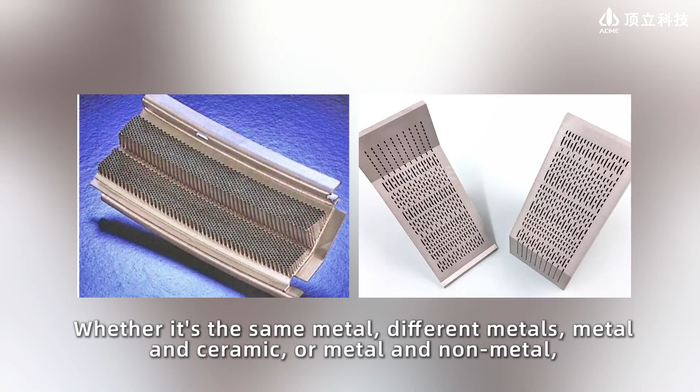Can you believe it? There's a technology that can fuse different materials together without any adhesives. Whether it's the same metal, different metals, metal and ceramic, or metal and non-metal, it achieves an atomic level bond, forming a seamless, solid piece.

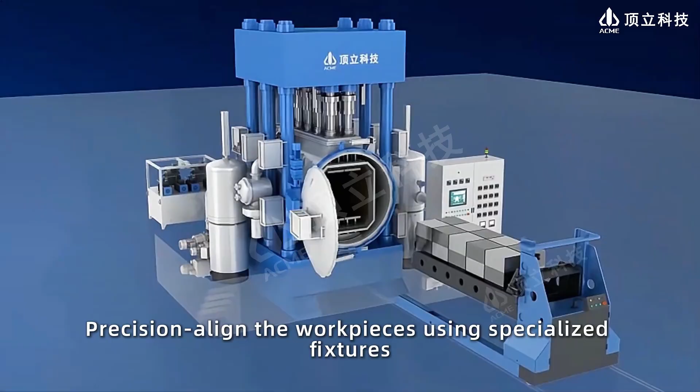This is vacuum diffusion welding technology. Precision align the workpieces using specialized fixtures and place them into the vacuum diffusion welding equipment, pumping the furnace chamber to high vacuum to prevent high temperature oxidation and facilitate diffusion.

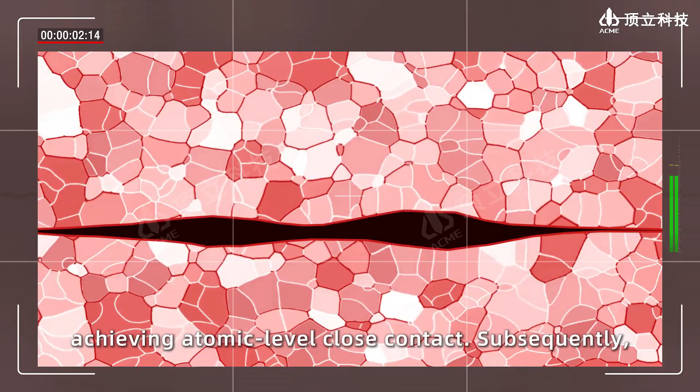The diffusion welding process temperature is generally set at 0.5 to 0.8 times the base material's melting point, with corresponding pressure applied simultaneously. Under the combined action of temperature and pressure, microscopic plastic deformation occurs at the contact interface, achieving atomic level close contact. Subsequently, atoms continuously diffuse across the interface, ultimately achieving solid-state metallurgical bonding.

After completion, the workpiece is slowly cooled, depressurized, and removed.

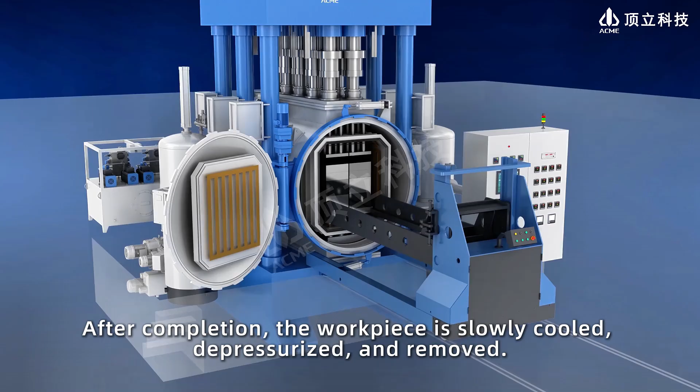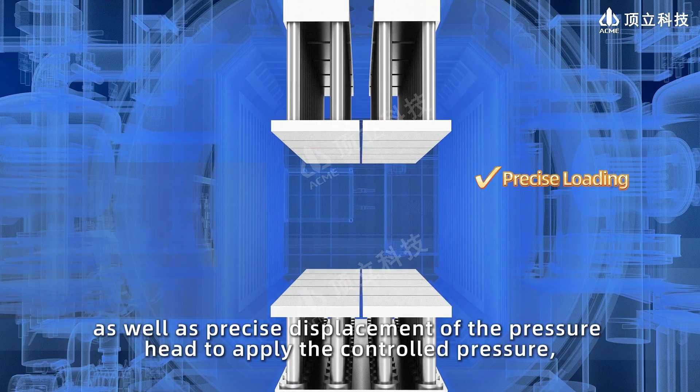The diffusion welding process requires precise control of the heating rate, holding temperature, pressure values, and accurate loading, as well as precise displacement of the pressure head to apply the controlled pressure, in order to achieve high-quality welded components.

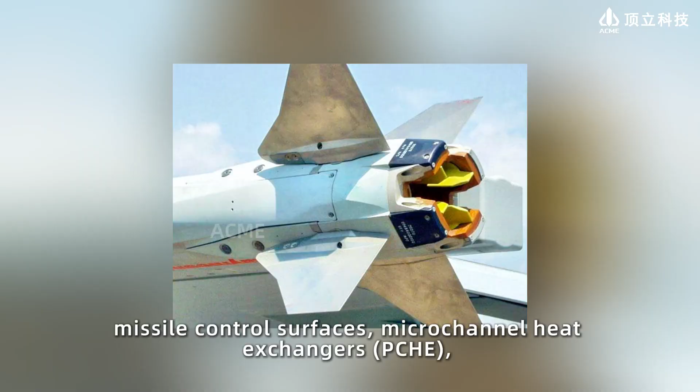Vacuum diffusion welding technology is primarily applied in high-end manufacturing fields such as aerospace engine blades, missile control surfaces, microchannel heat exchangers, nuclear power components, and semiconductor material chip packaging.

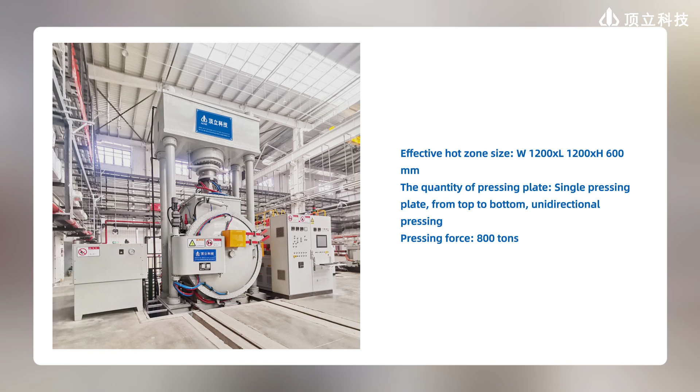Next, let's take a look at the mainstream vacuum diffusion welding equipment available on the market.